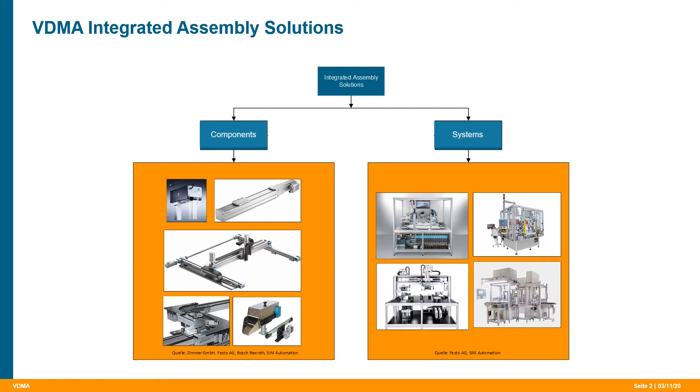Now coming to industrial joining technologies, which is the core scope of today's session, we are going to describe what IJT is. IJT was formed in May 2019, because a lot of customers and end users need to communicate between various systems based on a standard interface and a standard communication model. So the Industrial Joining Technologies work group was formed, where we have defined a taxonomy, as we can see in the slide, and this taxonomy is in line with DIN standard 8580.

Industrial Joining Technologies has a subcategory called press together and press in, which includes tightening, flow drill fastening, join by press fit, etc. It also has other mechanisms like gluing, riveting, clinching, filling, etc. These are all the technologies which will be covered as part of the IJT work groups. We will go step by step in detail through how we are going to define the scope and what will be covered as part of IJT.

To start with, since there are many technologies under joining, we have to start with one specific technique. So we have started work on the tightening specification, which will be the base or foundation block to be reused by other joining techniques. And we are taking care of a lot of common features based on the technical discussion, so that it is much easier for other techniques to reuse the specification when they start work on it.

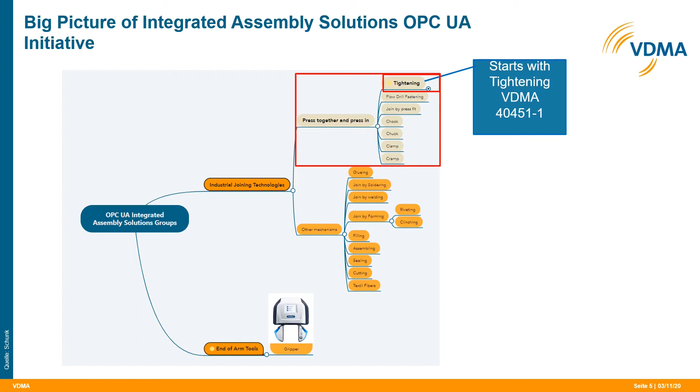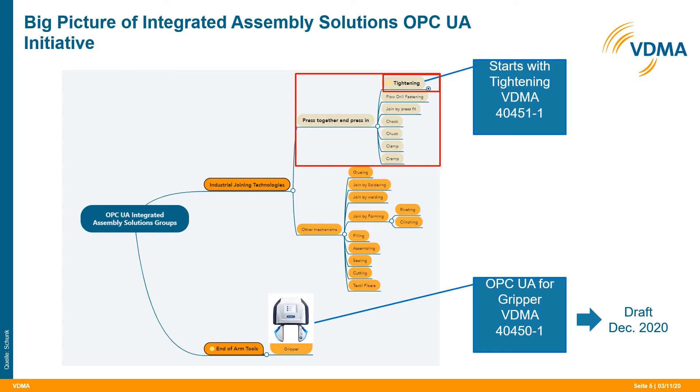So this is currently in progress, and there is also a specification to define a standardized model for grippers that will probably have a draft version available by the end of this year, and next year they will have a formal release. So this is the overview of what the OPC UA IAS initiative is.

We are going to discuss the purpose of industrial joining technologies. As we explained in the previous slide, industrial joining technologies is a very important part of the assembly process, which includes various techniques like tightening, gluing, etc. Now the goal is to have a vendor-independent and interoperable communication model between different techniques and between different vendors. And there should also be a common model for interoperability between other techniques.

So with the help of the first step, which is tightening, we define tightening-related data, and we are also trying to define common features which will be useful or can be reused by other joining techniques. So we have started the work for tightening for that reason.

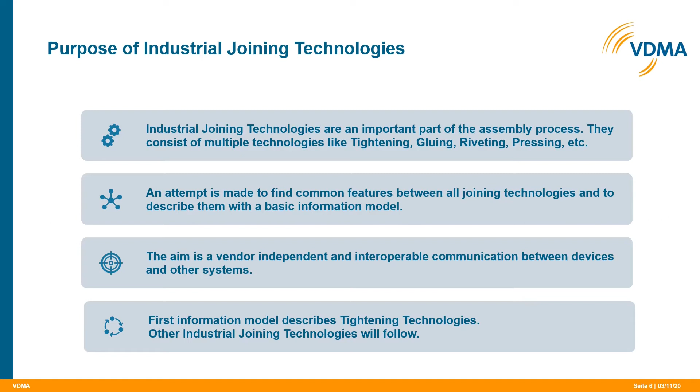And other joining technologies like gluing, probably gluing would start in a month or so based on the current discussions, and other techniques would also follow. It's not like a waterfall model where everyone will start after the specification is released from tightening. It can be a parallel process. So there are discussions in progress, and once we have more updates, you will know that from the VDMA portal. Next, we are going to discuss the benefit of the IJT specification.

So as you can see here, without the OPC UA IJT companion specification, there are different techniques, and different techniques communicate using their own vendor-specific information models. So for an end customer, integration becomes a bigger problem, because there is no interoperability between different systems. This is the core problem, or the need for starting the work group on IJT.

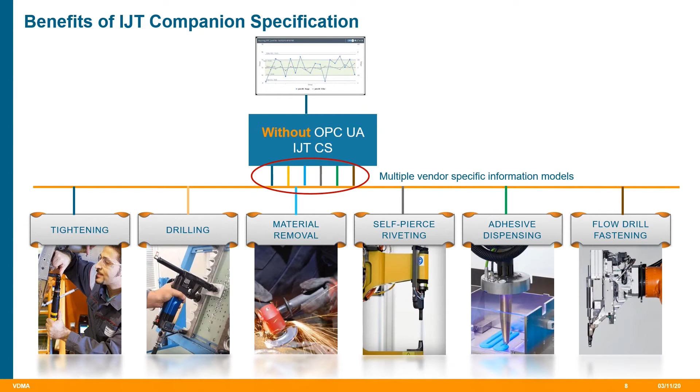Now let us go to the next slide where we will be able to visualize what will happen once we have the IJT companion specification. As we can see here, in the previous slide, we had multiple communication interfaces and multiple communication models. With the help of the OPC UA IJT companion specification, which will be built on top of OPC UA core building blocks, that will help all the systems within joining to communicate using one common meta. This is the end goal, which will really help the end customers integrate different vendor systems into their production environments.

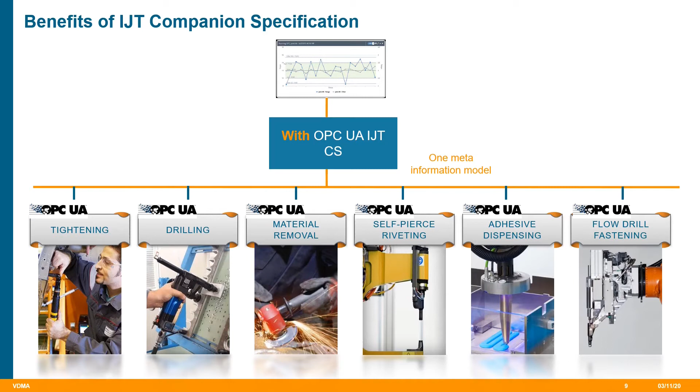Now let us go to the next slide where we are going to discuss a brief overview of the scope of the IJT tightening specification part 1. As we can see here, the end goal is to have an interoperable description useful for all the tightening systems within the tightening domain. This is based on OPC UA core object-oriented models. On top of the core models, and by reusing other companion specifications like OPC UA for Devices and OPC UA for Machinery, we define the building blocks, which will be reused by other joining techniques also.

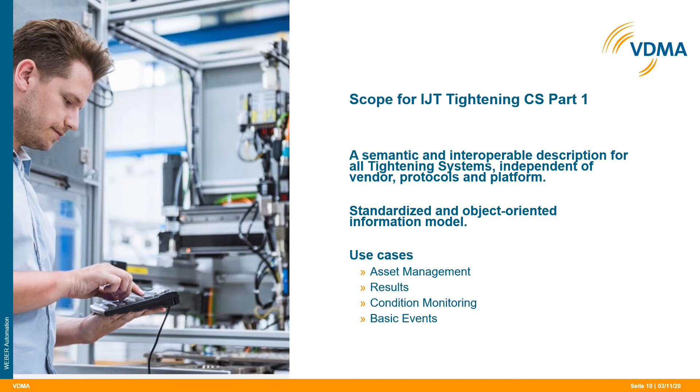So in asset management, the end user will be able to get an overview and identification of physical assets in their system in a standardized way. In asset management, we are reusing the OPC UA for Machinery specification for identifying the machine and relevant components in a standardized way. For example, manufacturer, serial number, software revision: these are some standard parameters which are common for all the physical devices or physical assets within the given system.

Then comes the most important use case for all tightening-related customers. What is the tightening result? The tightening result is nothing but the process output of the tightening operation. And what would it include? It would include the measured torque, for example, the measured angle, any variation in the measurements, any violation in the measurement based on the configuration, and any error information which will be part of the results. So this is the core thing needed by an end user to evaluate whether the tightening operation was successful or not, and details about what parameters are included within the tightening result.

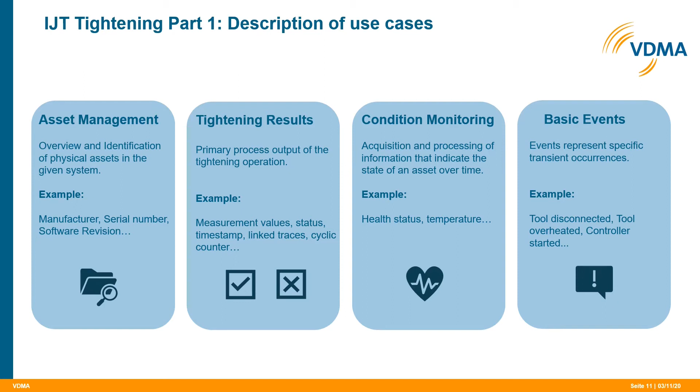Then comes basic events. This will be built on top of OPC UA core events model. And for part one, probably we will only define a placeholder which will be easy to extend in part two and later. Here we will define a basic building block for various set of events which can occur within the tightening. One simple example of an event is tool disconnected or tool overheated. These are some kind of events which can occur within a system.

Okay, let's go to the next slide where we are going to discuss a little deeper on the asset management use case on what we have defined till now. So here we can see an overview of tightening system asset management. These are the list of assets which we have defined in the work group, and out of all these assets, controller and tool are the mandatory assets to model any specific system within tightening. The reason is, without that tool, we will not be able to perform any tightening operation.

And controller, whether it is an independent physical controller or controller embedded on a tool, that is the place where the OPC UA application will be deployed, and that will report the values or any other parameters to the external clients or MES applications. So that is the reason controller and tool are the minimal assets needed to define a specific tightening system. In the next slide, we will see an example view from an OPC UA client.

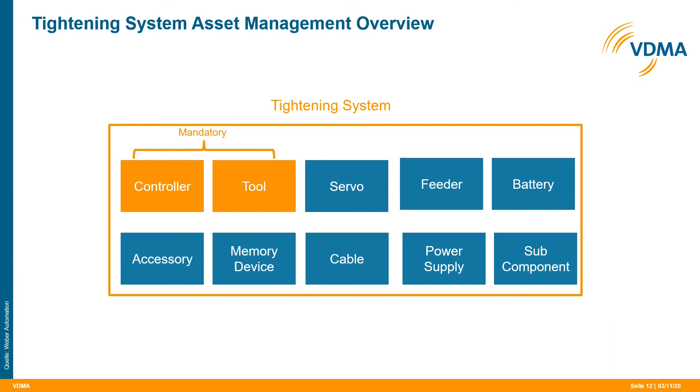As we can see here, the data which we have defined for asset management is very much flexible. We can define various types of tightening systems. For example, handheld tightening system, fixture tightening system, intelligent tool tightening system. Various types of models can be easily defined using the asset models created in the tightening specification.

In this example, as we see here, we have a handheld tightening system, and when we dig deeper, we see a flat list of all assets, like a flat list of accessories, batteries, cables, controllers, etc. That is one way of accessing the data of assets. User can get a flat list where he will be able to get all the information of a specific asset. Also, user will be able to see hierarchical and non-hierarchical relations between various assets.

As we see here, we have a tightening controller and we have an identification module. This identification module is reused from OPC UA for Machinery, where we have used the machine identification and component identification types. Then this tightening controller has a subcomponent called memory device, and then it is also connected to a stack light and a servo. And then the servo in turn is connected to a cable tool. So this is one way of visualizing the data in a hierarchical way, and one way of visualizing it is in a flat list. So this makes this model very flexible to define any type of tightening system.

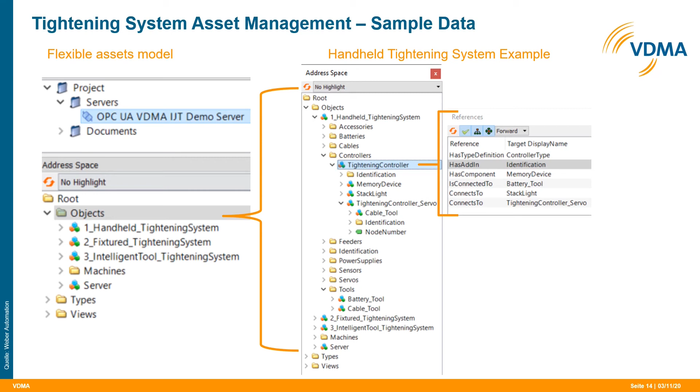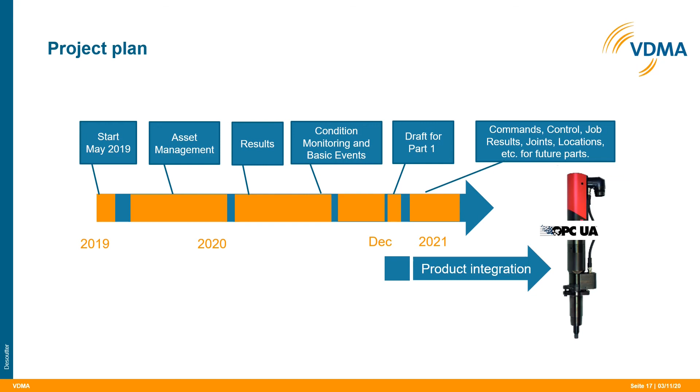The second option to contact us is to contact Etienne Axmann, who is the head of VDMA IAS. And you can also contact me. That's not at all a problem. You can contact any one of us in the working group and let us know if you have specific feedback and/or specific inputs or priorities which need to be covered in part 2, or a review of what we have defined in part 1. If you have any specific comments, you are most welcome, and that will really help in defining a very good standard specification. So that's it from my side.